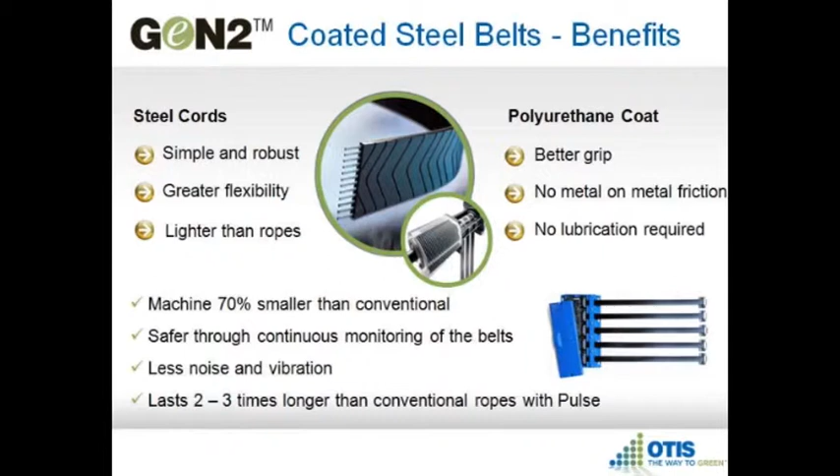The machine is a permanent magnetic machine. It's 70% smaller, so it allows for smaller headrooms within shafts. It's safer equipment, less noise and vibration, and there's no lubrication required as well for the belt technology.

Looking at regenerative drives, which I'll come on to in more detail later, you can see that historically in 2000, this is the type of consumption we were looking at with the Gen 2 with the non-regen drive. We moved on to 2007 to introduce the regen as standard, and that gave us 58% savings. Now we've brought out a new model of regen drive, which is giving us another 10% savings. So you're looking at 68% electricity savings on the running costs of your lift.

I'll come on to that in more detail, and we've got a small clip that will help you understand how that works.

This is the product which has been brought out in the last 2 years. It's been developed mostly for the Asian market, but is also in the UK and Ireland. For most lifts, it requires 3-phase power, and that can be 10 grand of an upgrade in an existing building. This new product will basically allow you to fit a lift and plug it into single phase supply. So for existing buildings, it is very user friendly. It doesn't mean that you have to have 3-phase power. In areas where there is difficulty getting 3-phase power, west of Ireland, for example, southwest of Ireland, it's very, very costly to get 3-phase in.

This lift will run by itself on battery backup for up to 100 runs. Doesn't even need power. So it's very innovative, and it was designed specifically for the Asian market where they have huge problems with spikes in power and entrapments, etc. But that is now available for the Irish market.

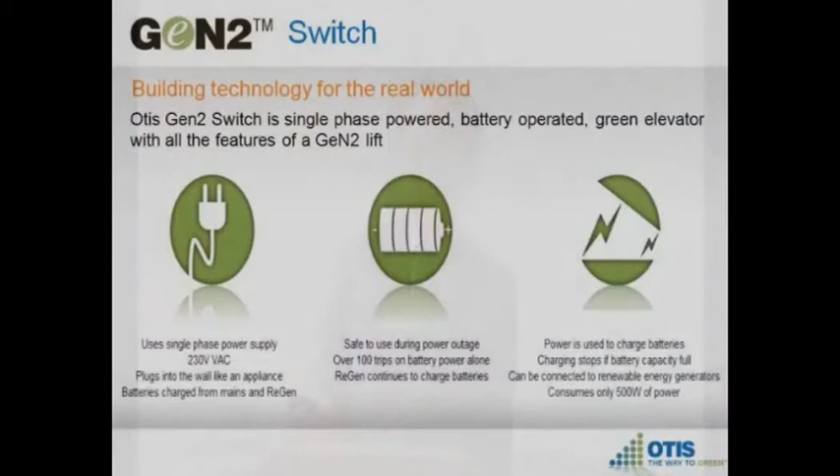Modernisation of lifts. We've spoken with John and with Gordon in the past about modernisation. The life cycle of a lift is circa 20 years. You can get 40 years, you can get 30 years, it depends on the technology. But most independent consultants would consider the life cycle of a lift to be 20 years.

The majority of the lifts that we have here are in excess of 10 years. So we should be starting to think about sinking funds. We should be starting to think about finance. We should be starting to think about how we modernise, why we modernise, and the rationale for modernising lift equipment. Do we modernise? Do we rip the old one out and put a brand new one in? What are the opportunities and risks in relation to that?

For modernisation, you're taking the best part of the original lift that's there and you're upgrading the parts that are becoming less reliable. There is less disruption to the building, less builder's work. The programs are normally about half to two-thirds of the longevity of a full replacement, and the costs are normally similar, about two-thirds. So for modernisation, we have 3 different types of lift.

We've got the traditional lift where you've got a machine room on the top of the apartment blocks. You'll see these in all of the 1960s, 1970s, the brownstones in town, and you'll wonder what that hut or that little block on top of the building is. That's the machine room for the lift.

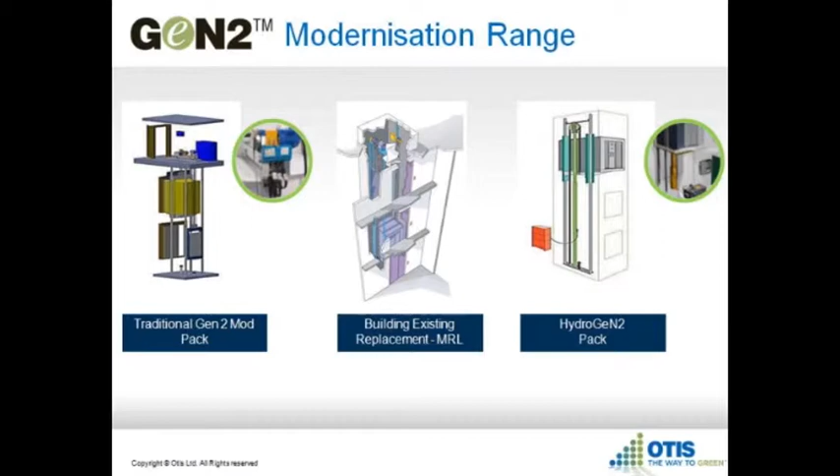And then you have hydraulic, which is the old technology. You know it's hydraulic because basically there's a big oil tank, and if there are issues in terms of the lift being under pressure, it smells like you're burning oil. It smells like there's a chipper near the lift. That's old technology and really needs to start being replaced now in full.

Why modernise? We've said safety, ride quality, and other things, but the main reason is the running costs.

This is a case study for a 1.6 metre per second lift, about 1300 kg capacity, up to 1600 kg capacity. This is before modernisation and this is after. On most test sites where we put meters on before and after, we're finding around 80% energy saving, which is very substantial.

It depends on whether the lift gets most of its utilisation during the day or at night, but in most residential properties it's during the day, so you're on the day premium kilowatt rating. It also depends on the kilowatt pricing or contract with the energy service provider, but overall up to 80% energy saving.

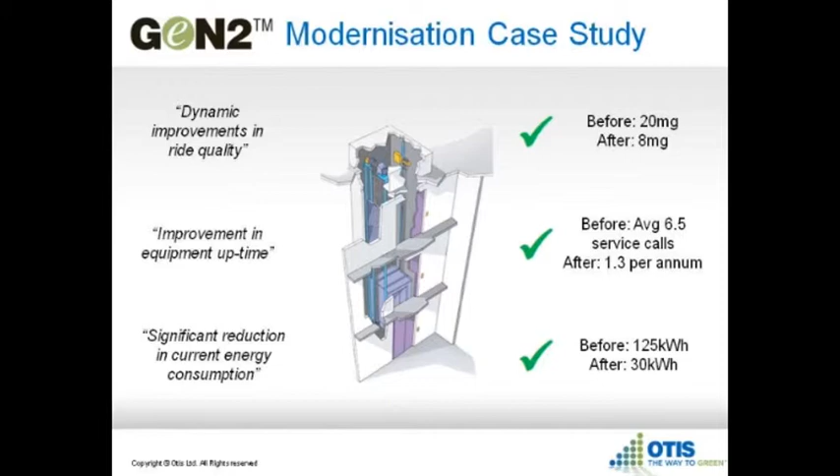Other reasons include ride quality, improved equipment uptime, and significant reduction in energy consumption. Ride quality is improved by nearly two thirds. In terms of levelling accuracy, after modernisation you're looking at plus or minus 3 millimetres. This matters because it means fewer potential compensation claims and fewer trip hazards.

Callbacks are very important. We have what we call rogue, critical, or rebel units. With older technology you could get 6, 10, or even 12 callbacks per annum, which creates a perception that the equipment is unreliable. With Gen 2 technology, the average callback per annum due to fair wear and tear is 1.3, so less than 2 callbacks per year if maintained properly.

And as we discussed, in terms of energy consumption, the savings are around 75 to 80%.

The Gen 2 mod standalone solution can be applied not just to Otis equipment. If you have a machine room above on a lift and want to modernise, come to us. This technology is patented, so we take all our new equipment technology and apply it to the old engineering - the guides, landing doors, and car doors all stay in place.

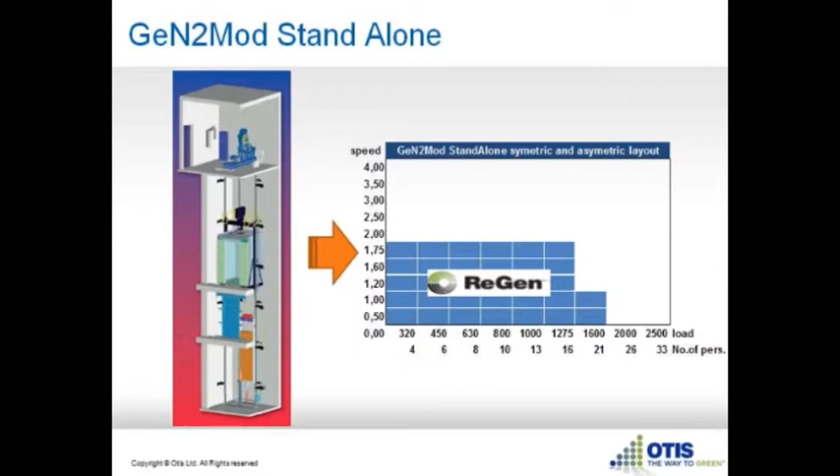We install a new controller, a new magnetic machine, new travelling flexes, and a new car operating panel inside the car with push buttons and position indicators. From a ride and energy consumption point of view, the lift is as good as new - but all of that is only seen inside the shaft.

So we do recommend that if you're going down this route, you also look at upgrading the car, so the clients actually see something for their investment. Again, for hydraulic lifts, I won't repeat myself, but the same sort of technology can be applied.

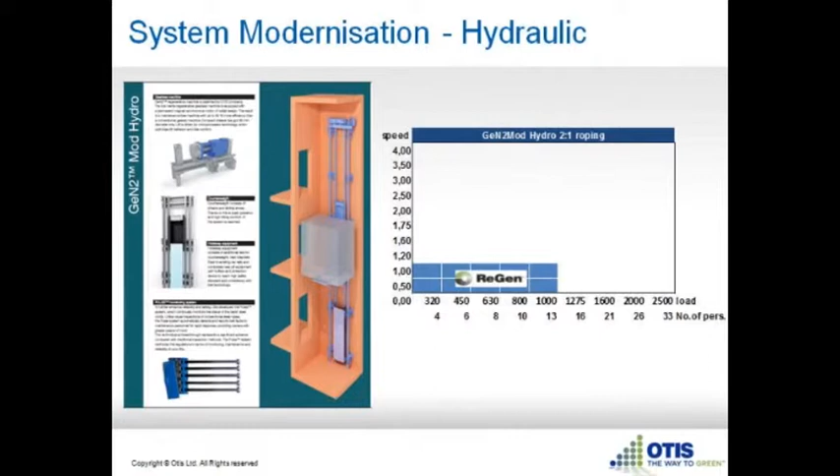That's an example of post-modernisation. Doesn't look like much, but that's the controller. That little grey barrel is the machine. This is the pulse monitor that sends electrical pulses down the belts to make sure they're sound. And that's the bed plate - so the lift is hanging directly below the slab.

We have examples all over Dublin. It's one of the most successful products we've had in terms of post-modernisation. We've done it on both non-Otis equipment and Otis equipment. If any clients want to see or reference our testimonial sites, we have sites all over Dublin city centre.

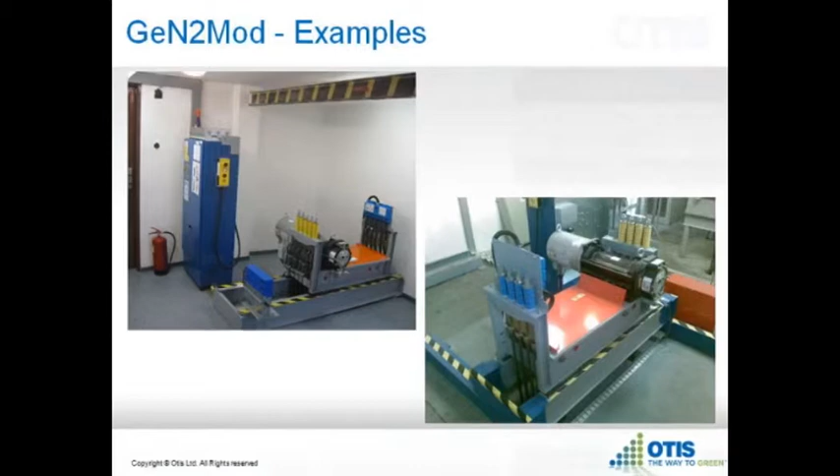On the Otis contracts, we have 4 different types of contracts. We don't call them basic, semi-comp, or comprehensive, or bronze, silver, or gold. Instead, we outline what is involved in terms of scope of work for each individual element of the service provision, and what's included and what is not included.

What we've found when comparing contracts across the industry is that there are large gaps and areas of contention in terms of what constitutes a comprehensive contract. In our opinion, a comprehensive contract is fully comprehensive.

It would include basic call-outs during normal working hours, call-outs outside normal working hours, minor consumables, and major components. Within major components I would include machines, controllers, full belt replacement, full rope replacement, drives, and boards - all fully inclusive.

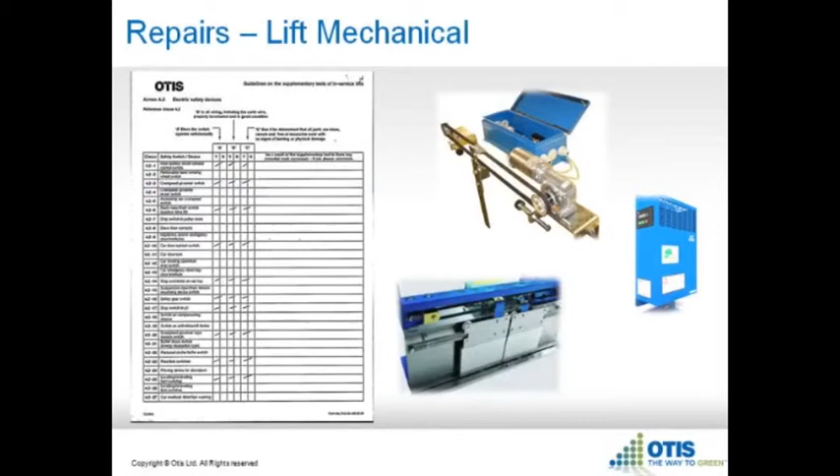This is just a small section on portfolio upgrades. The type of things we should be looking at across the lift in order to save clients money: door operator standbys, signalisation standbys, LED lighting to replace the existing lighting in terms of actual kilowatt rating, motion sensors so the lights in the lift shut down when they aren't being used. There's loads of green packages out there that are beneficial to the client that will pay for themselves in less than 12 months.

It's something we can differentiate between ourselves and O'Dwyer's, going to the clients and saying, for this investment it'll pay for itself in 12 months, and then you'll have that value for the years thereafter.

Regen drives, how it works. I'm going to play you a clip on this, it's only a 3 to 4 minute clip with an American accent unfortunately, but it is what it is. It gives you an idea of how lifts actually work, because you don't see what's in the shafts, so it might be of benefit to you, and gives you an idea of how regen will work, and what sort of energy savings your clients can actually expect from it.

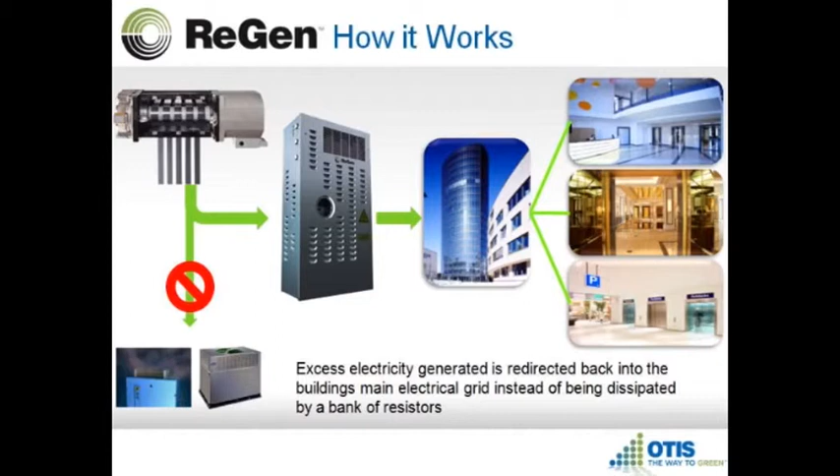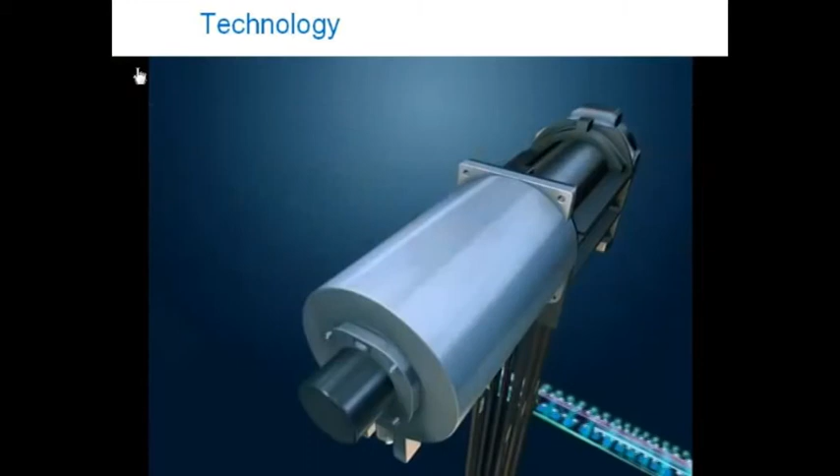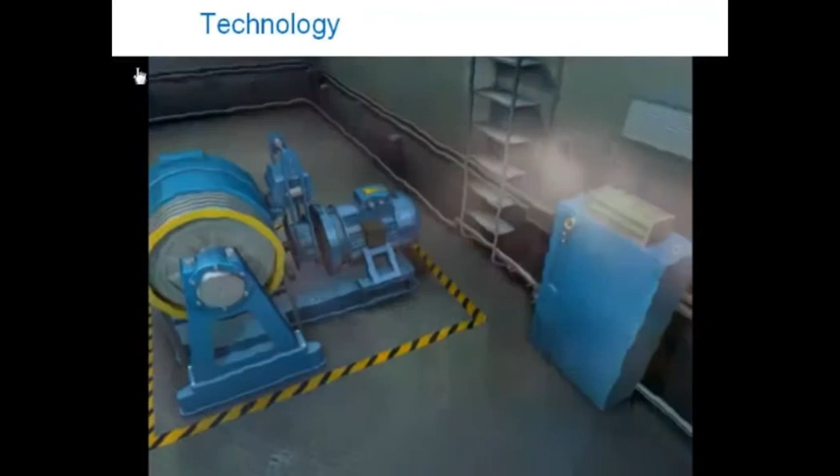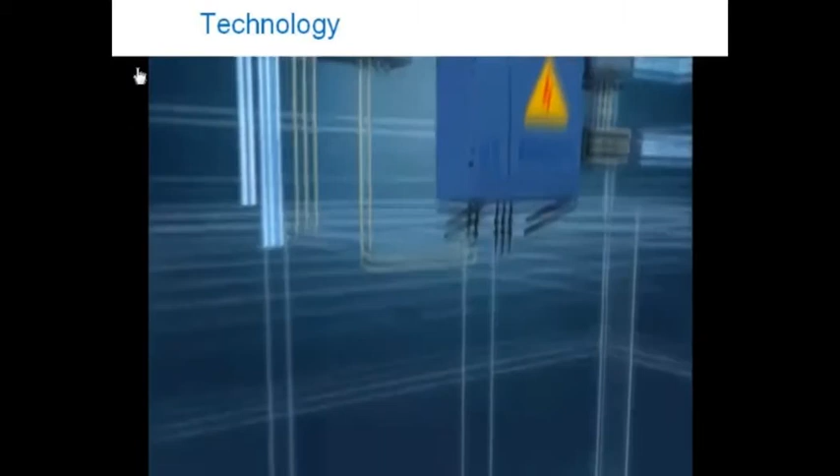Otis proudly introduces a new energy-efficient technology that can deliver savings of up to 75% compared to conventional elevator systems. Regen drives meet the demands of green building initiatives by providing a powerful solution that significantly reduces energy demand and lowers overall building energy costs. A conventional elevator system consists of a car, a machine, and a counterweight. The counterweight is designed to balance the weight of a half-loaded car. As a result, the counterweight is heavier than an empty or lightly loaded car, but lighter than a heavily or fully loaded one. This difference enables the elevator to utilize gravity to travel up with a light load or descend with a heavy load. When the car utilizes gravity, the machine creates electricity, just like a generator. In conventional systems, the electricity generated by the machine is wasted. It is fed back through the elevator electrical system and dissipated as heat through resistors, creating waste heat loads in the building. Regen drives conserve this energy and put it to work. Combined with highly efficient gearless machines, Regen drives feed this energy back into the building's electrical grid, where it can be used to power other building systems. The Regen drive's reduced energy consumption makes it the smart choice for green building initiatives. By reducing energy consumption during periods of peak load, Regen drives provide substantial energy savings.

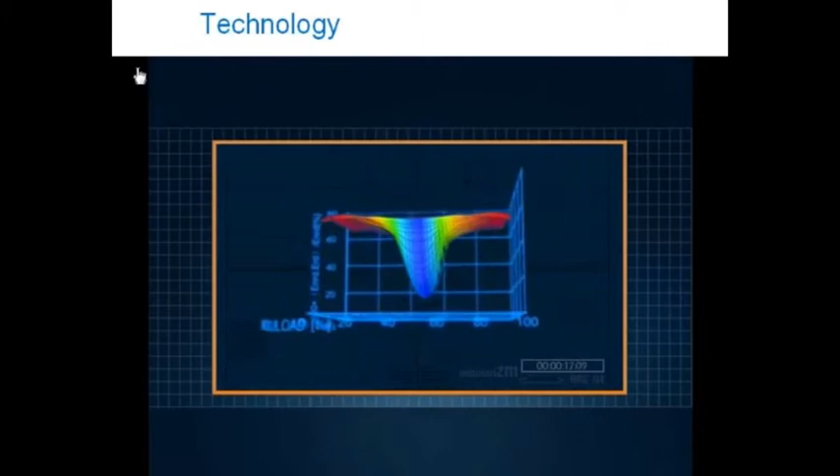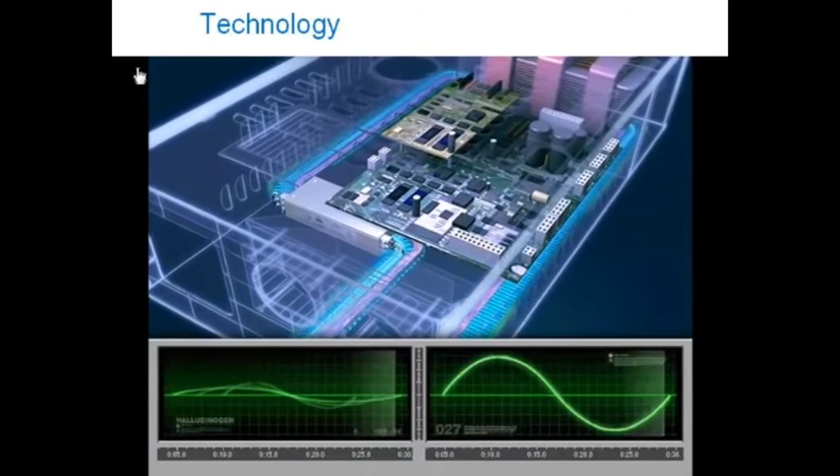Regen drives also produce clean power, which dramatically reduces the harmonic distortion of the incoming line current, resulting in less pollution of the building's electrical power system, helping to protect sensitive building equipment.

The Regen drive's robust design can withstand significant voltage fluctuations and can operate with all standard voltages from 170 volts to 528 volts, making them an ideal choice for a broad range of applications.

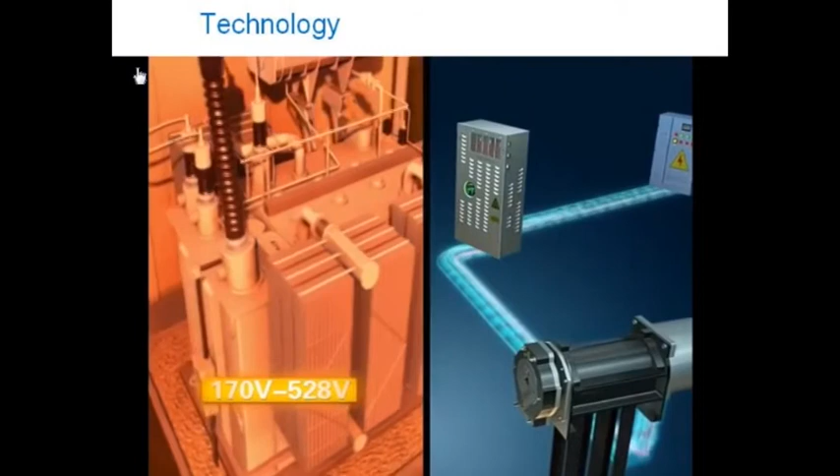Regen drives, another example of how Otis is leading the way to a greener, more energy-efficient future.

So that just gives you an idea of the type of savings that can be applied. All of this is very well because it's in the machine room or in the shaft, but most of our clients and residents only see one part of the lift, and that's the car. So we can invest 40 or 50 grand on a brand new lift and lift control system, but every now and then upgrades to lift aesthetics are important to look at, both from an aesthetic point of view and also from a safety point of view.

Something small like having a half-height rear mirror in the lift car is important, because as you enter the lift, you can see somebody coming in behind you. That's why they're called for under DDA.

Similarly, the flooring - if it's solid black and somebody is visually impaired, they're less likely to get into the lift because they feel there might be a void. So maybe we should have patterned flooring, etc.

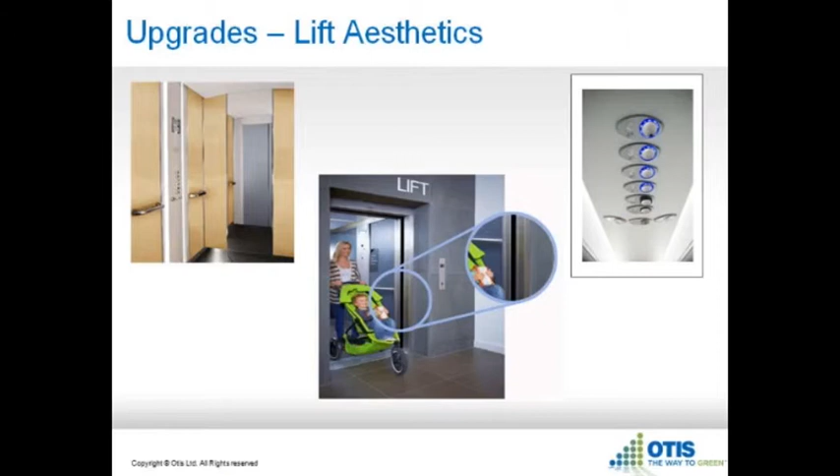Remote elevator monitoring is a fancy word for what we call autodialers, except ours is much more than an autodialer. It allows us to interrogate the lifts. For example, I gave one of your previous colleagues an example down the road, the lifts in Grand Central - we can take control of the lifts remotely. So we can have an elite engineer on a laptop taking control of the lift, releasing passengers remotely, doing remote diagnostics, bypassing floors. The technology is endless.

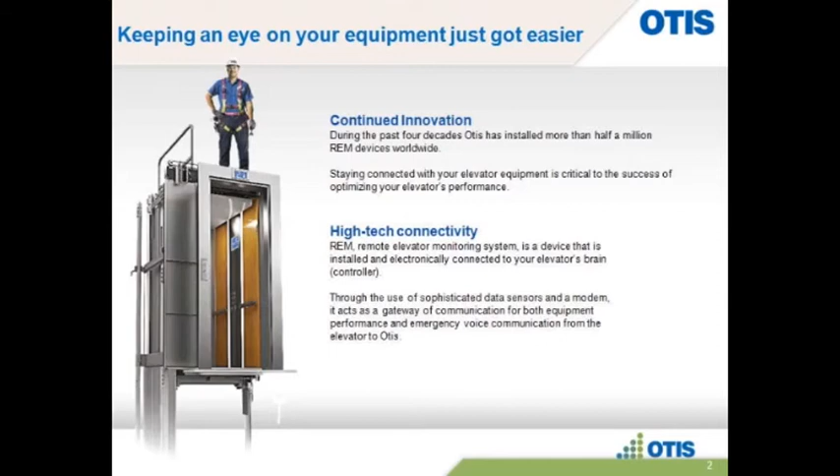So basically the remote elevator monitor allows us to control the autodialer, control the two-way communication, control the testing of the phone line, but also allows us to bring in flexible functionality. So things like restricted floor access, modifying door times, energy saves, remove the group from operation, suspend a lift from service if you're doing a fit out, anti-nuisance, other bits and pieces.

If you've got a VIP coming into the building and he wants to go from the ground floor to the penthouse, you can bypass all the floors. You can dedicate the lift to him or her, etc. So that's what the REM technology has, and that's patented technology. And that allows us to do this elite service, which I'll come back onto very quickly.

The elite service is a priority service that we have, and again, it just goes back to the remote elevator monitoring technology, and more details can be found on the presentation.